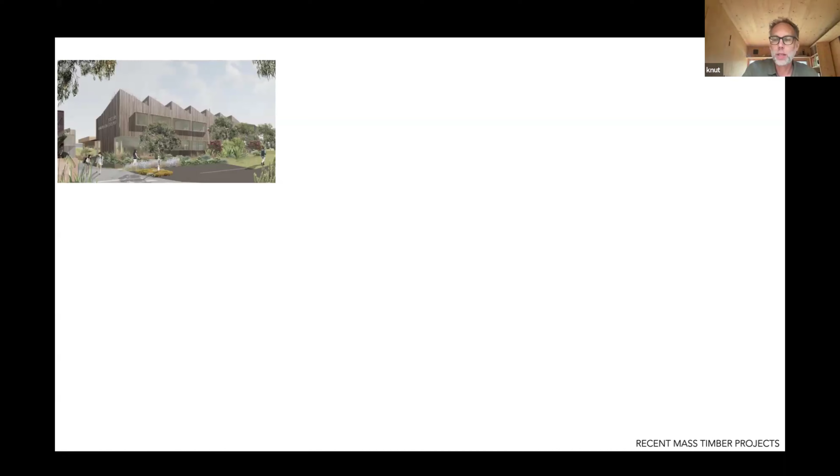It's a residential house, Passivhaus as well. I think there was a bit of concern from architects in general about using CLT, particularly in combination with thoughts about fire and CLT. So just very briefly, myself and my partner, Bettina Steffens, we're a small company in Coledale. All we do is CLT buildings, really, at different scales, mainly residential and education projects.

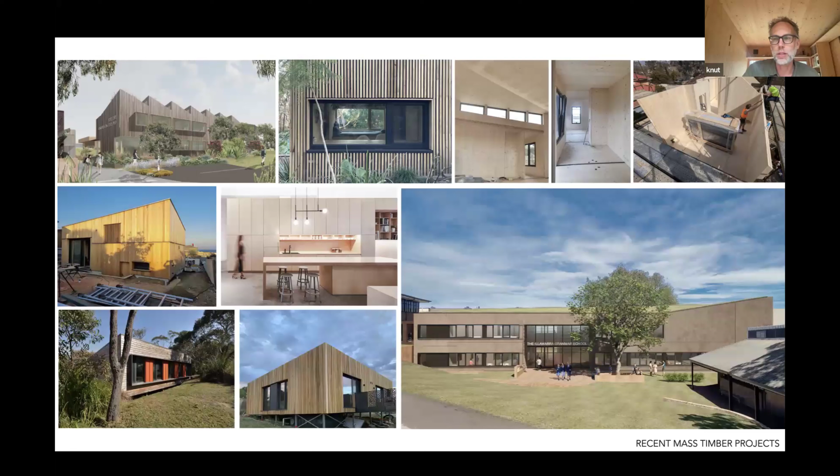Why do we use mass timber to start with? There are lots of reasons, and one of the big ones is the quality of the finished product, because it's prefabricated, built and pre-installed in a controlled environment. You've got speed of construction on site, and with that, cost reduction, because labor is expensive. Obviously there are health and psychological benefits of timber, the buzzword biophilic design, which I don't like to use often, but sometimes people can relate better to this. There's lots of research about the psychological effects of using timber in buildings on human beings, which I think are really valid points.

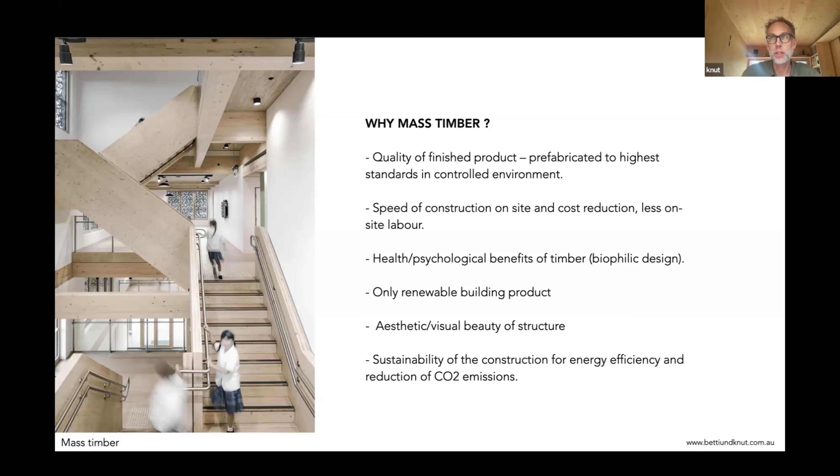It's the only renewable building product. Obviously we like the look of it, the way buildings are put together and the structure and the way that it works. Then there's the sustainability of the construction: on the energy efficiency side, you've got at least a 100 mil thick timber panel as your main structure, which is very different to having a 150 mil thick piece of concrete as your structure. Then there's the reduction of CO2 emissions, which is one of the main reasons we have as a default to use CLT, to reduce the impact on the environment.

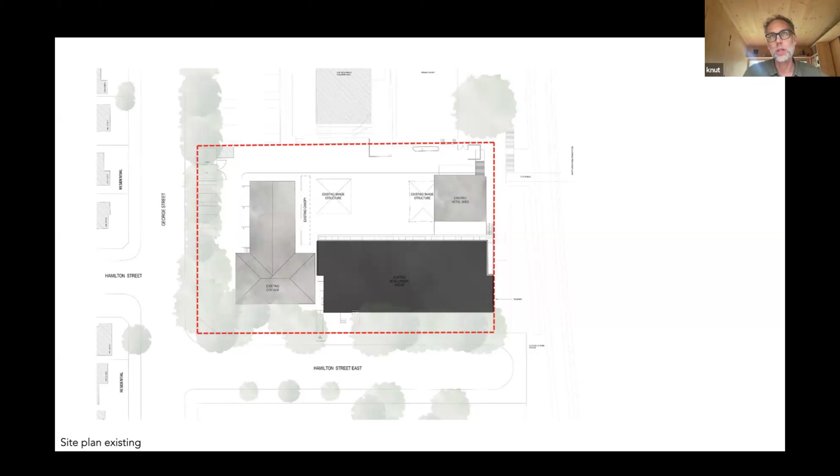This project, Our Lady of the Assumption, is a primary school I worked on when I was still at BVN, and I think it was Australia's first CLT school. This is not a Passivhaus project, which is the other part we usually use in our work, but it was one of the first CLT projects. The project uses an existing building, an old Telstra building from the 1970s. The Catholic Education Office bought this building and thought they could just turn it into a new innovative primary school, which we did in the end, but not in the way the client originally anticipated, with just doing a refurbishment or fit out.

This is the final project. It's a very small site, as you can see, very constrained for a school going from K to year 6.

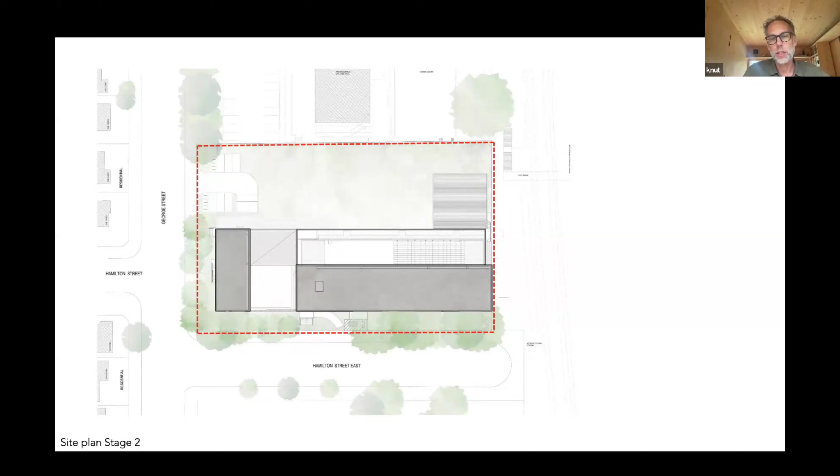So we used some of the roof space for playgrounds and sports fields, and we built on top of the existing structure and extended it with a new hall, all in mass timber.

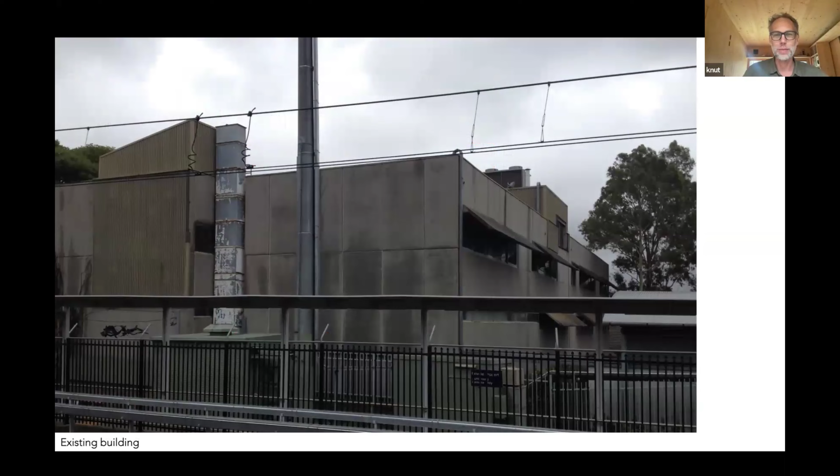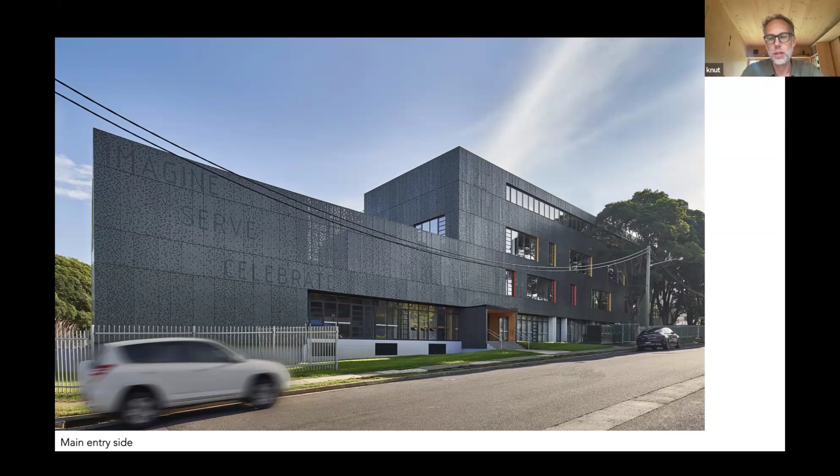The outside is a zinc facade with some custom perforations and play with words from their logos and visions. Internally, it's all exposed timber as much as we could manage.

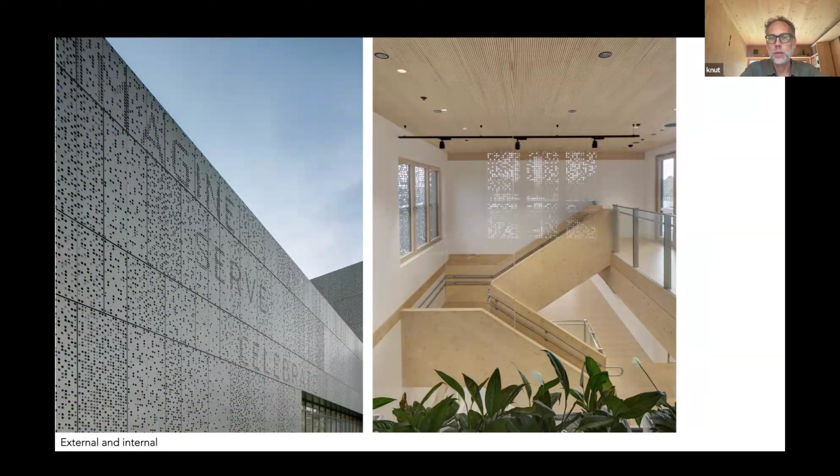There are only some parts, mainly the atrium, where we had to enclose the CLT because we've got a 4-story atrium here. As you can see, we have a stair that runs through the entire atrium. It's an open atrium, and the stair uses the CLT as the structure, so there's no additional steel.

That stair on the right cantilevers quite a bit, without any additional support except the part you can't see at the bottom. And we've used timber throughout, including the ceilings.

I'm going to go into quite a bit of detail on the ceiling here. There's an acoustic timber ceiling, part of the prefabricated system, which had a huge impact on this project. This is the top floor of the building.

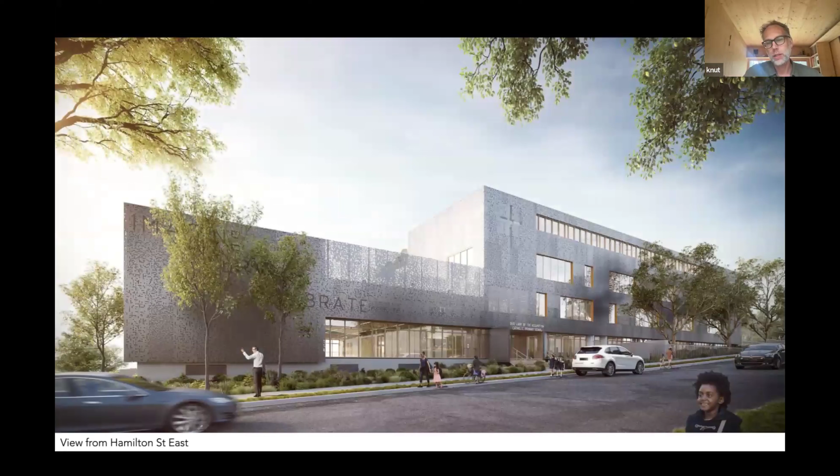Going through the different parts - I'm just going through the render to show its build up. Obviously the external part of the building. Internally, the gray bit is the existing Telstra building.

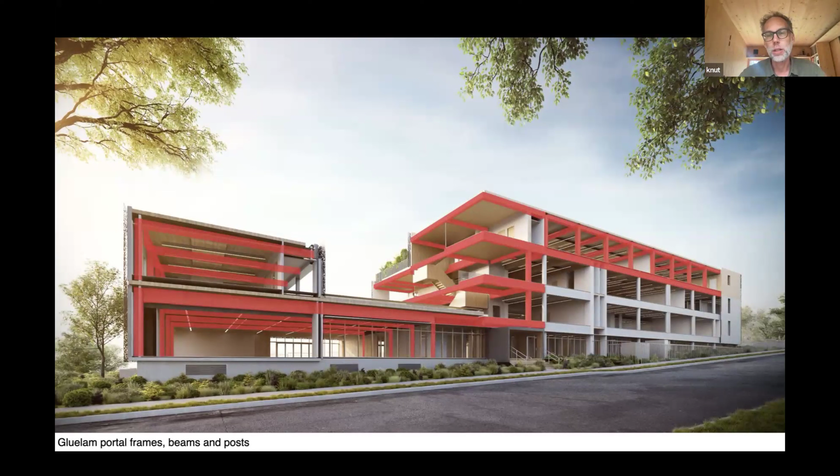Then all of the glulam timber columns and beams, using a very interesting connection system from Switzerland, from Neue Holzbau AG. We even have moment-resisting connections on the top part of the roof, which a lot of people in this industry say isn't possible in timber, but it is if you've got the right products. All the walls are CLT, cross-laminated timber.

Our ceilings or slabs use a cross-laminated timber system with prefabricated acoustic ceilings, from a German company called Lignotrend, which was a huge part of getting this project over the line, mainly for cost reasons. I'll go into that a little bit later.

Looking at the existing part - this was a very complex project, and probably not the easiest to showcase the benefits of mass timber construction, though it still does. You start with a building from the 1970s, which had concrete columns.

The columns were 30 mil, 50 mil off - there was a grid there, but obviously it's not perfect millimeter construction since it's in-situ concrete. But the timber structure comes in with a 2 millimeter tolerance, so you have a very precise building put over the top.

So what we had to do to start with was take a 3D point cloud survey of the top floor to see exactly where all those columns and existing beams we were keeping are located, so you could use that as the basis for the 3D model for the timber structure. We got this 3D point cloud survey done, which had about 10 gigabytes because it picks up every square millimeter, which was essentially unusable because it was so large you couldn't open it with any computer program.

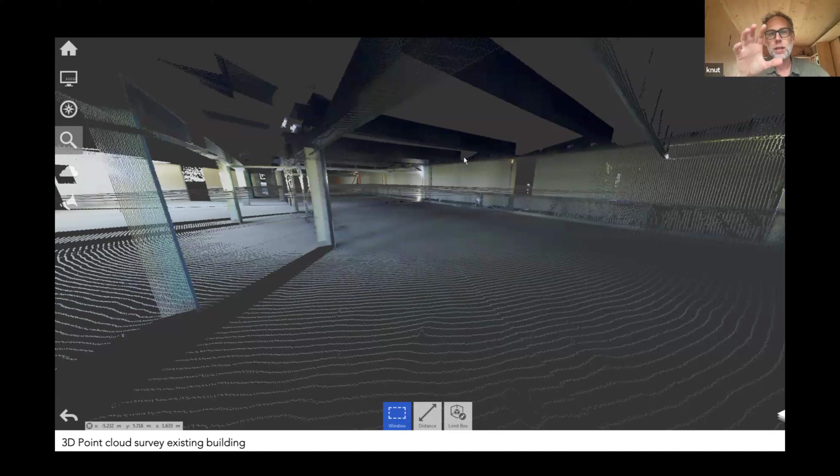So what we did there was we always used the areas where we had a connection as the real 3D point cloud survey, and the rest was just modeled generally, looking at the glulam portal frames, beams, and posts, going into some details.

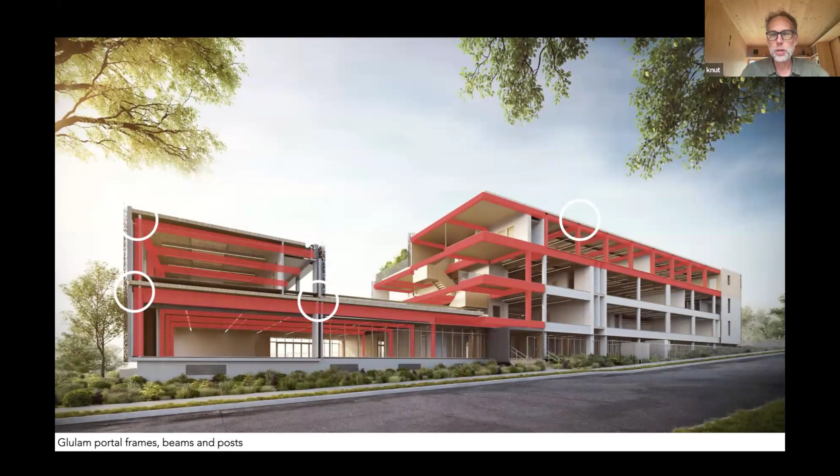As I mentioned, we've used Neue Holzbau AG, a Swiss company. They have a very good system of connections - glue laminated threaded steel rods that are integrated into the timber, which is great for fire performance because none of that steel is exposed. And then these elements go together really easily.

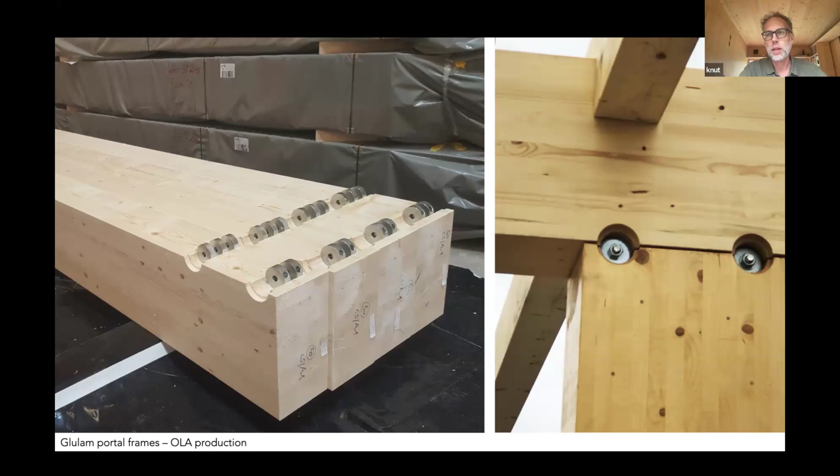I'm going to show you one of these - these are the top floor columns and beams. On the left side is the product as fabricated, and on the right side as installed on site. There are two nuts that needed to be fixed to get this connection going. In general, from all the installations, it takes about 15 minutes to install any timber element, whether it's a column, a beam, or a slab. That way you can actually predict pretty well how quickly the building will be put together.

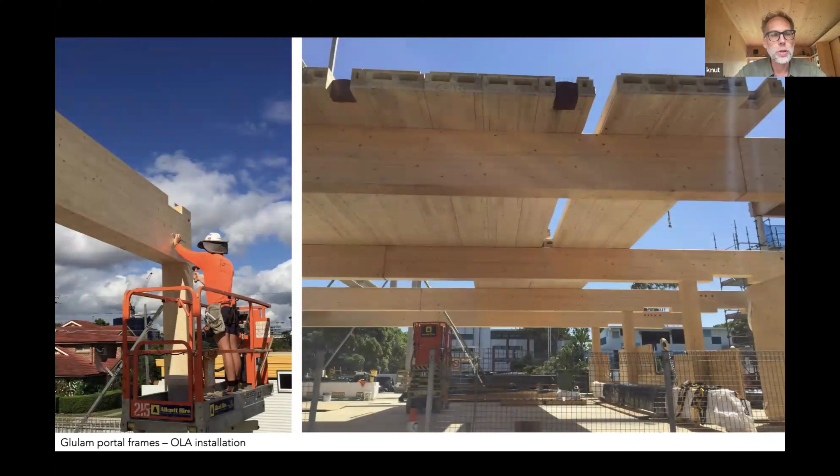What you can see here is the hall. You can see the guy on the left side - he's just hammering in 5 bolts, and that's it, to connect these 18-meter, about 900 high beams for the hall. It's a bit more of a detail here - again, very strong and very safe connections because they're fully embedded in the timber. As you can see on the left side, those holes will then be plugged with timber and rock wool so you have protection for that little bit of steel that is otherwise exposed.

It's a very fast way of installing it because with some connections you have lots of screws and that takes some time, but these ones are a very, very efficient way of installing. You've got the continuation in the beams - a little bit of what you can see here is the ceiling. This is actually a photo from the site on the day it was installed.

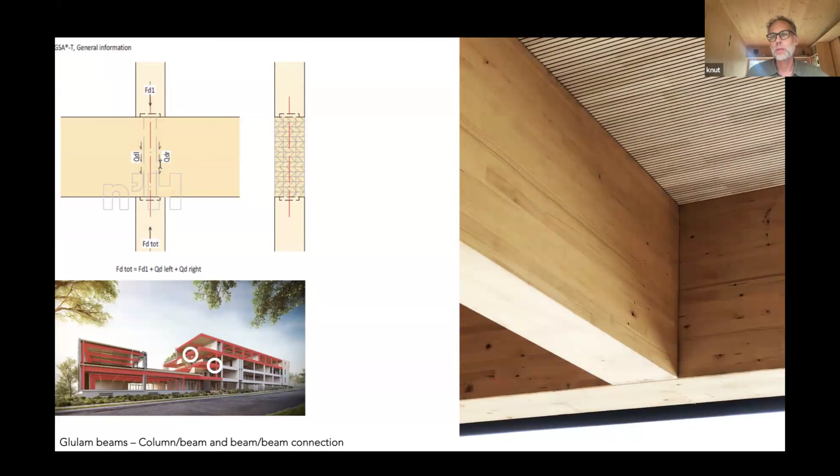That was one of the reasons why, with the Lignotrend CLT slab system, we were able to convince a builder who won the job on the cheapest price and thought they could convince the client to go traditional and do it all in concrete and steel. We had to run through a whole value engineering process, and at the end of that process we were still there with the same solution - quite an amazing outcome, considering the builder had no interest in building this in timber because they didn't know about it.

You can see on this beam connection you don't see anything in terms of connections, because these beams - the 9.5 meter long beams - had brackets installed in the timber, as you can see on the top left side. They were moved in from the top, and then there are just 2 screws fixed from the top. Once you put the CLT slab on top of that, this piece of steel is fully encapsulated within the timber, so it is safe from fire in its first instance.

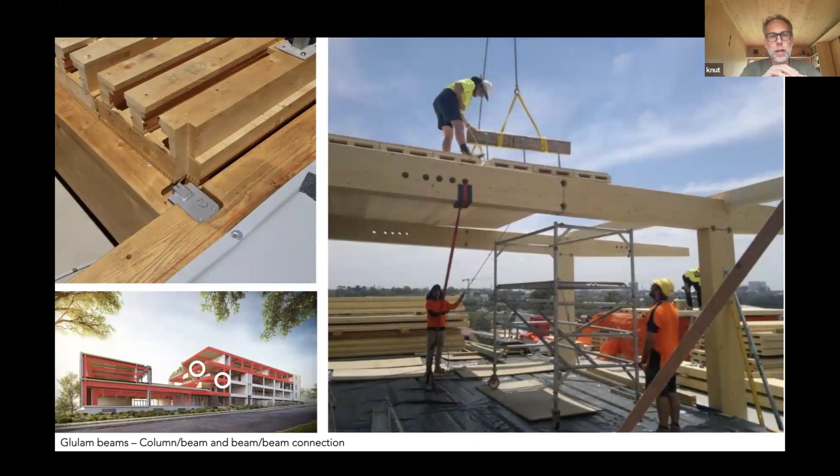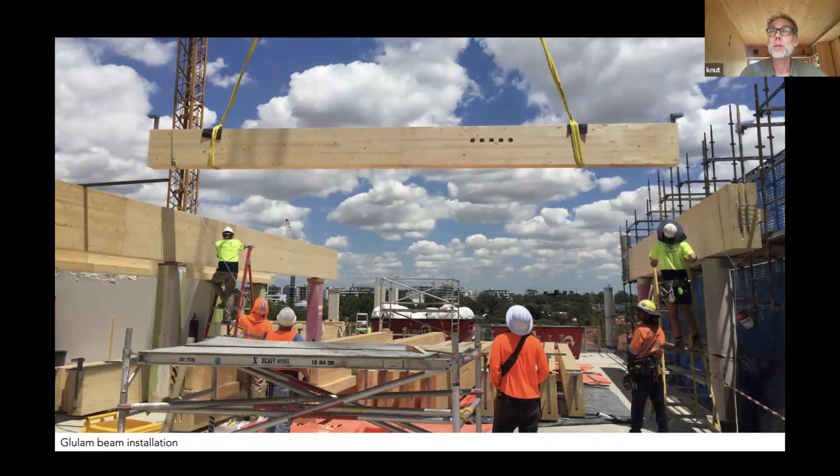Also, what you can see is there are very few people on site. These guys have been running the project, about 3.5 to 4,000 square meters, with a team of 6 people for the timber structure. In an ideal world, they would just come to site, do their job, finish it, leave it, and then the builder comes back in and continues. I think that's one of the key lessons we've learned over the years - if you've got a good team of CLT installers who know what they're doing, and a good head contractor who knows how to plan and follow on with other trades, that's the key to a good mass timber project.

You just see a bit of the roof structure here. They did about 500 square meters a day of the slabs to finish that off.

Walls, as mentioned, we're using cross-laminated timber, so there are some smaller elements as you can see on the left. Some elements were harder to reach with the crane, so they were pre-assembled, like this corner, then craned into place and fixed.

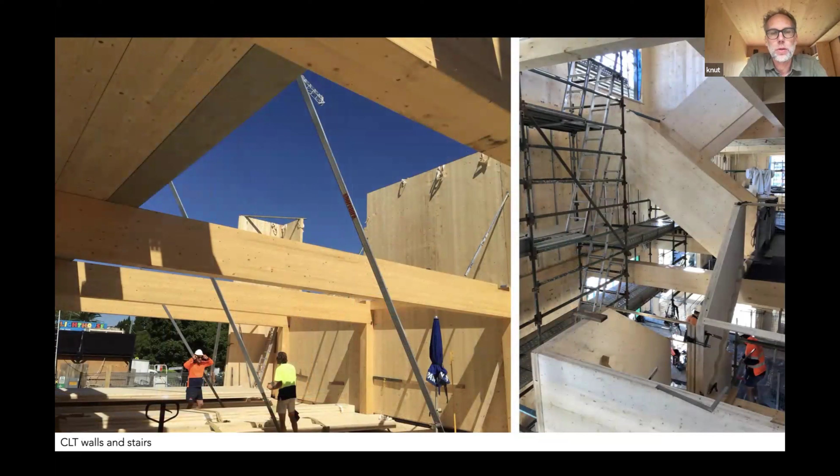We've got other areas like here where we're using double height, so these timber panels on the left side in the hall go over 2 stories. We often use CLT from overseas, from Austria, for lots of reasons, and you're a bit restricted with size due to container size. 2.25 meters is a good width for any panel, but you can go up to 11.5 meters long, so we're trying to make the most of it. That's why the panels are used vertically rather than horizontally, going over 2 stories.

On the right side, you can see how the stair was installed. First the balustrades were installed, which are the main structure of the stair, and then the treads were added in. That's a view of what was later the reading nook.

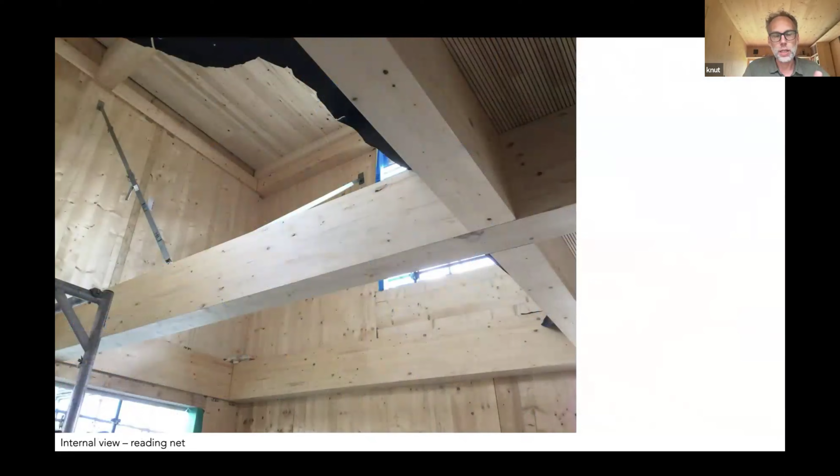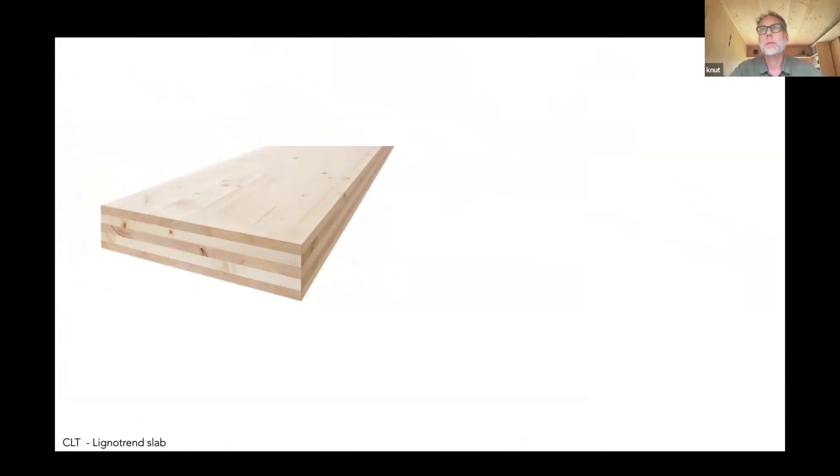Coming to the slabs - these were crucial because generally we'd use a solid CLT slab with our floor built up and our ceiling below. With a school, acoustics are really important, and an acoustic ceiling is a must, so there was no way of exposing the CLT as such to just get the acoustics going within the spaces.

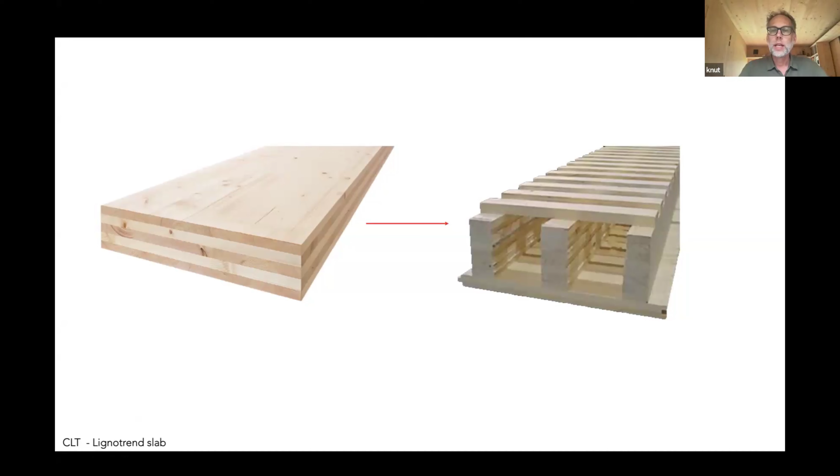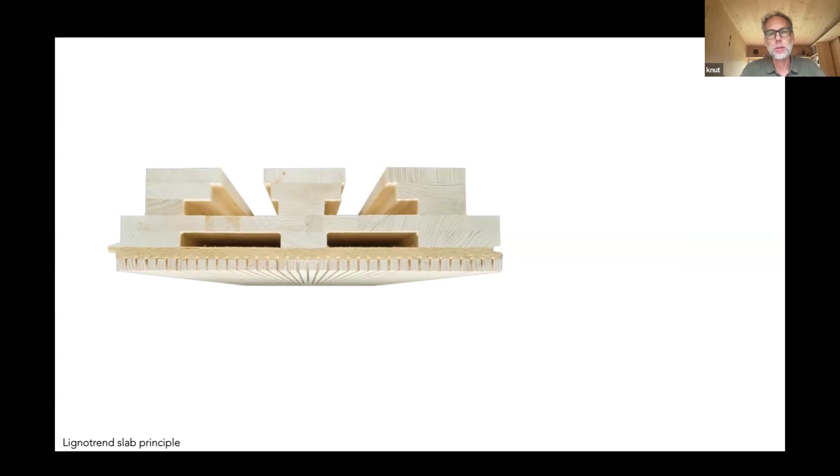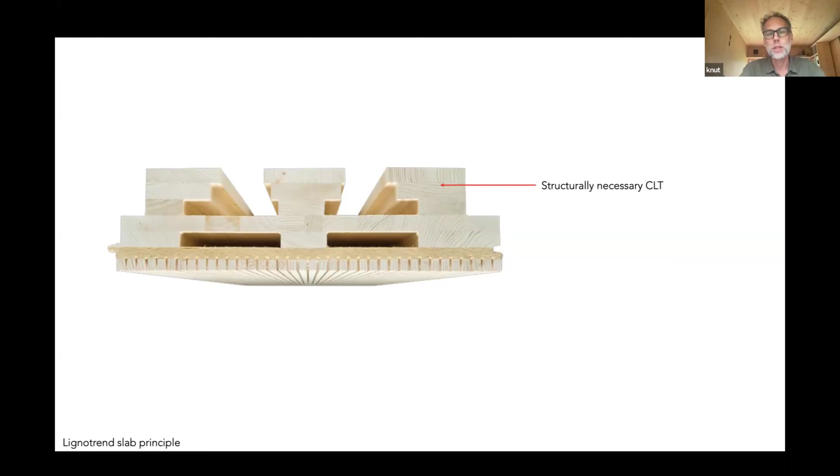So you've got the structurally necessary CLT, which is obviously necessary for your structure, and each project has different sizes. This is a very small size of those panels here - it depends on the spans, etc.

Then you're left with the services zone, so in this zone you can install electrical conduits. We've also installed the sprinkler pipes in this zone. Then you've got your additional layers, and that depends on what you need.

For example, in our project, generally you've got a 120-minute fire rating for a school project of type A construction, which with fire engineering we've been able to get down to 90 minutes. That means this area is where we increase the thickness of the CLT to achieve the 90-minute fire resistance, mainly done by the charring.

And then you've got your finish - it could just be a plain CLT finish, or an acoustic ceiling. This is what saved us the cost, because the additional cost of that beautiful timber acoustic ceiling was sitting at around $30 a square meter as additional cost. If we had taken this as a suspended acoustic ceiling, the same ceiling, and installed it on site, it would have cost us $220 a square meter.

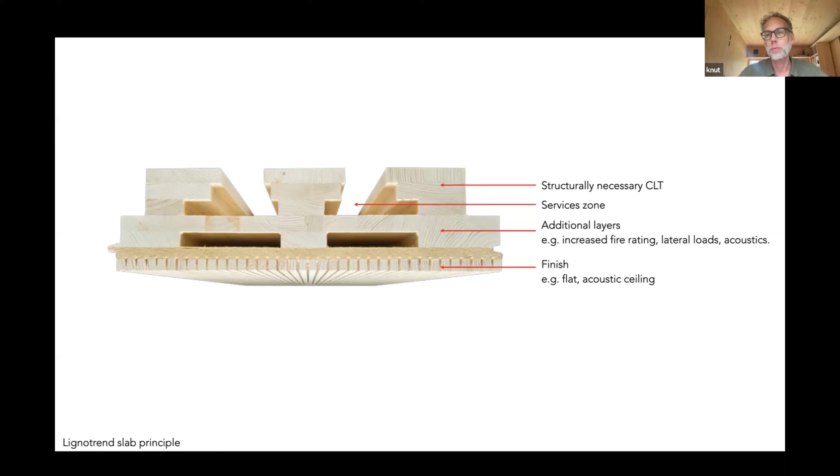That cost saving was, I think, one of the key reasons the builder was unable to get this to work any other way, because even with the cheapest concrete and steel structure, they wouldn't have been able to meet that cost with that price difference. This comes to the point that if you can do as much as possible within the prefabrication part, that's where you really gain the benefits in mass timber.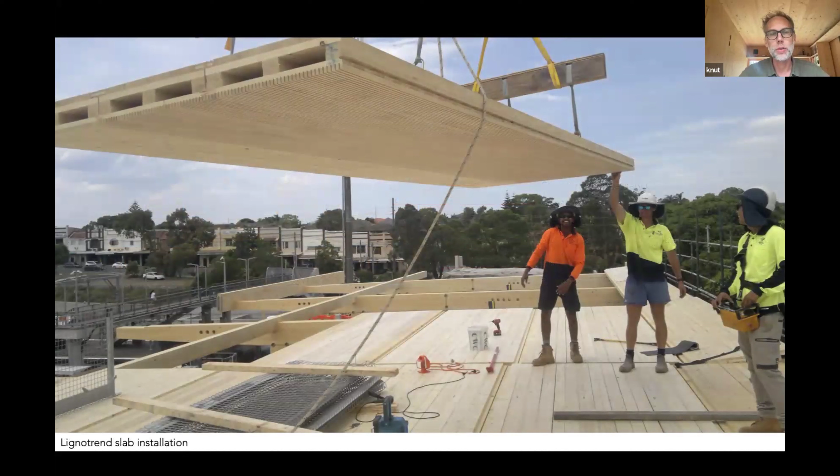This is how the slabs were installed. You have to be careful and think about how you actually lift them in place, because you can't just put a sling underneath - you'll ruin the underside, and it's also harder to get it in place. There's an interesting system the installer came up with to lift those panels in place, and then they're essentially lowered down onto the beams.

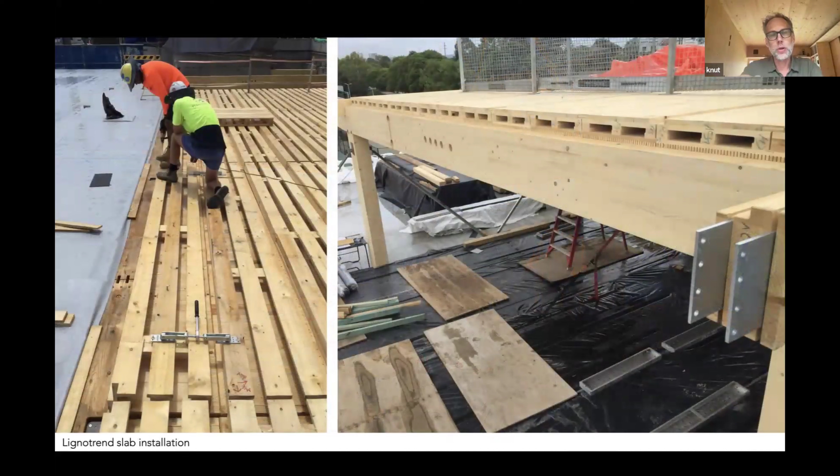And then with any type of CLT slab, or whether it's this system or another one, you still have to get them close together. So you see the ratchet at the front there, that's how you get the last centimeter from one panel to get them really tight against each other. And then there's lots of fasteners to go in, usually about 280 to 350 mil long, every 300 mil. That's how the whole structure is put together.

So on site, it's very interesting because it's a very clean site generally. This one was a bit different because we had demolition and an existing building, but generally a CLT or mass timber site is very clean and quiet, not that many people around. So this shows the system here, how it's then getting installed.

So you have all your services that you want to run in those areas, and then the leftover space is filled with an aggregate. This is mainly for acoustics, to get better acoustics out of the floor, because otherwise you're left with hollow spaces. With the mass of the aggregate, you get a good acoustic separation between the levels.

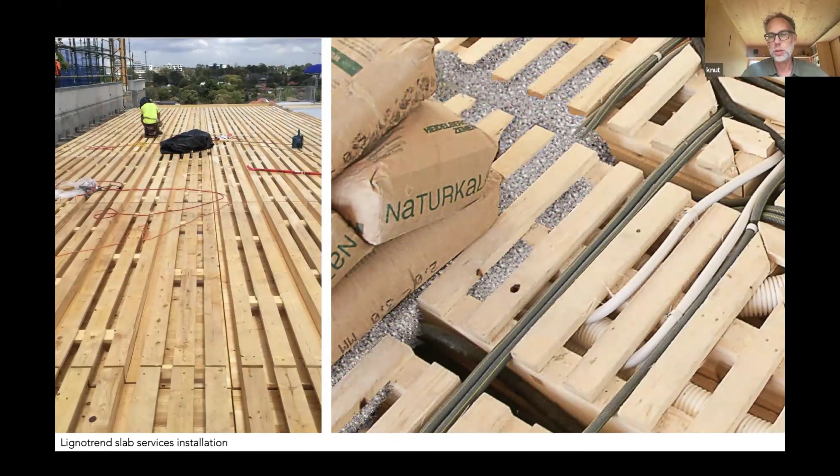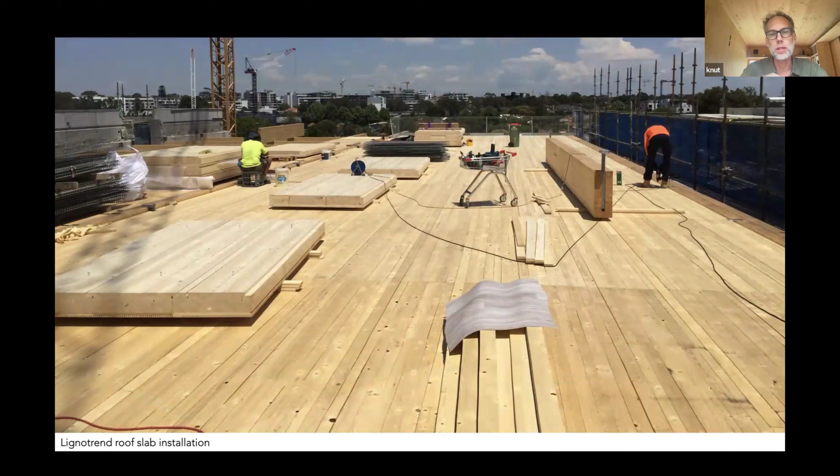Again, this is a photo from the day it was installed, so you've got a really beautiful, perfect ceiling there. And just some other photos from the roof installation. The roof slabs are not open at the top because you're not running services there, and also it's for keeping the weather out of the building. So you've got a closed top for the roof panels. This would be more like a traditional CLT panel.

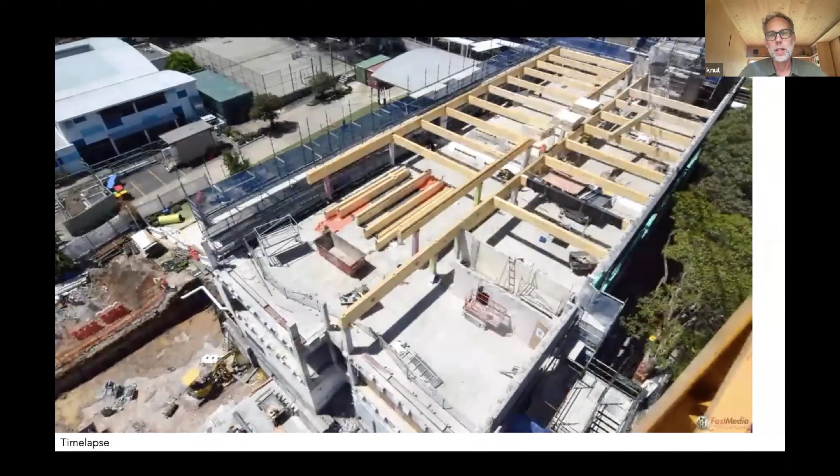And that's a very short time lapse, shortened a little bit just to show that part of the installation. You can see how the beams were installed, how the slabs went up.

I think key, as I mentioned, is the installation, and the follow-on trades to get this whole thing waterproof.

You can also see the build-up on the roof up there. Generally, this was not built as a passive house, but it was installed in similar ways. So we've got our insulation on the outside, and then our waterproofing membrane, and the same build-up for the walls.

This is just a little comparison that I usually like to put up with all of our projects, just looking at how much CO2 has been stored in the project. So in this project, we've stored about 1,400 tons of CO2 in the project's mass timber. If that had been built traditionally, we would have emitted 800 tons of CO2. So a very different perspective there. And that means essentially we've taken 490 cars off the road for a whole year.

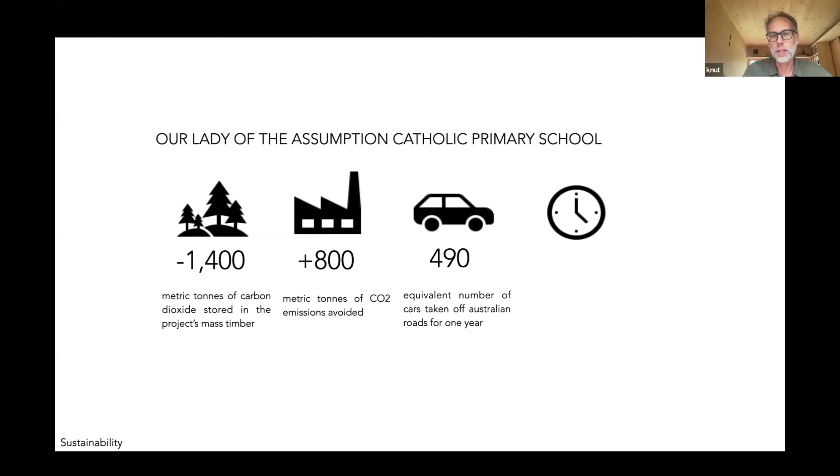And all of the timber that's been used in this project is regrown in 23 minutes. That's the regrowth rate of timber from where the timber was coming from.

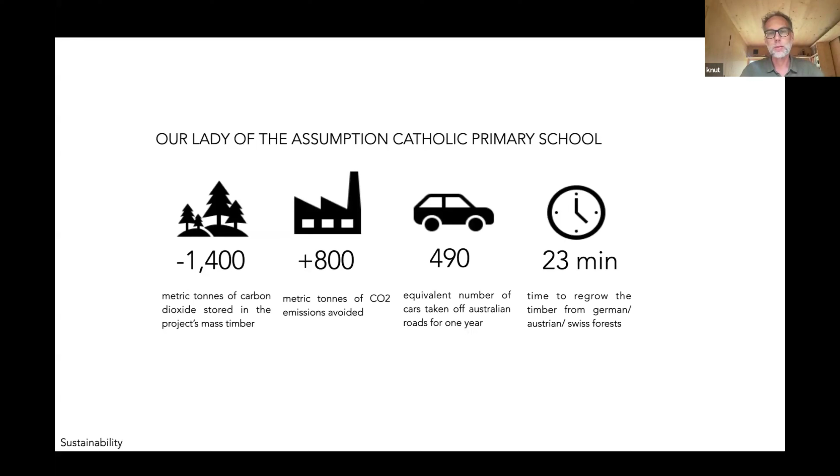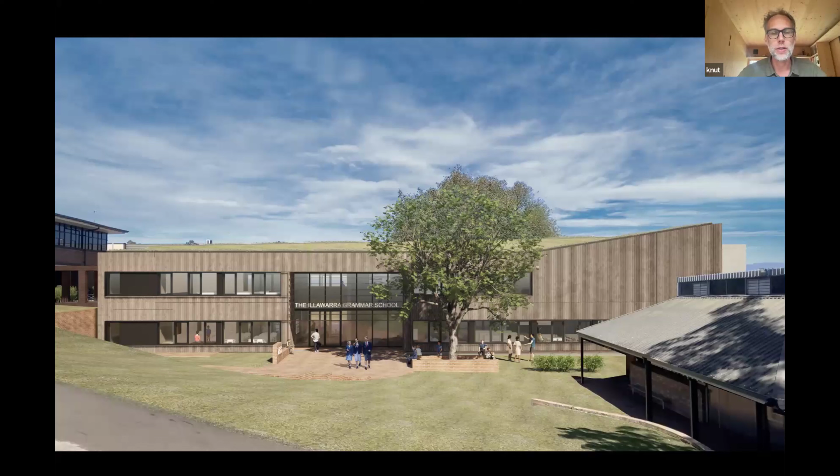And so just to lead into Russell's presentation, we just wanted to quickly show the project we're currently working on. This is the Illawarra Grammar School. This is going to be Australia's first CLT Passivhaus school, so another step further. That's a project we've just sent out for tender, so it's currently out in the market.

Two-story building. As you can see here, it's got a huge green roof.

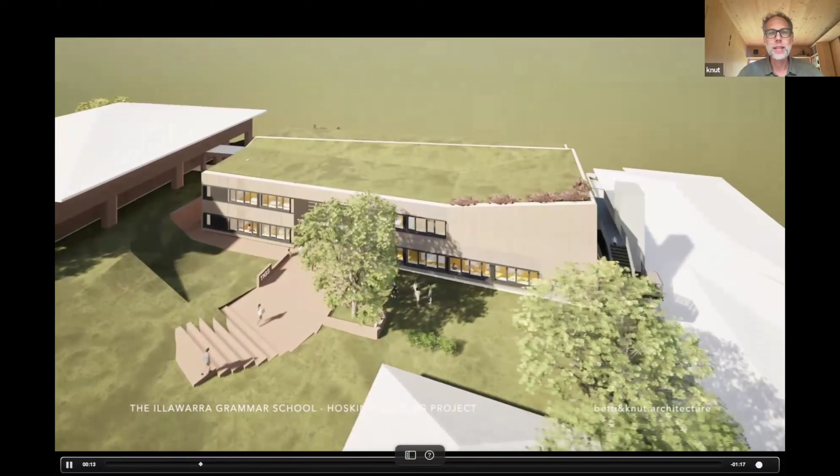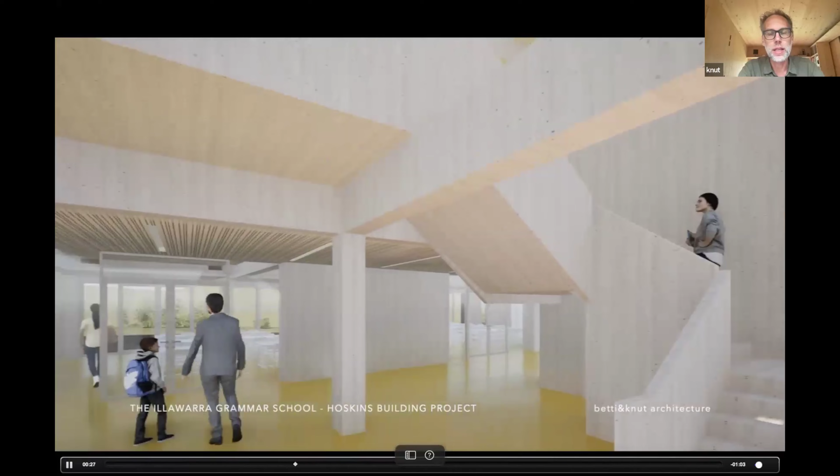Two-story building. We've got a timber facade in this case, which was great, and Russell has been able to justify that in the fire engineering. We've got the main two-story entry, again with the CLTs there, exposed CLT. We're exposing as much as we can. Again, we've got an acoustic ceiling.

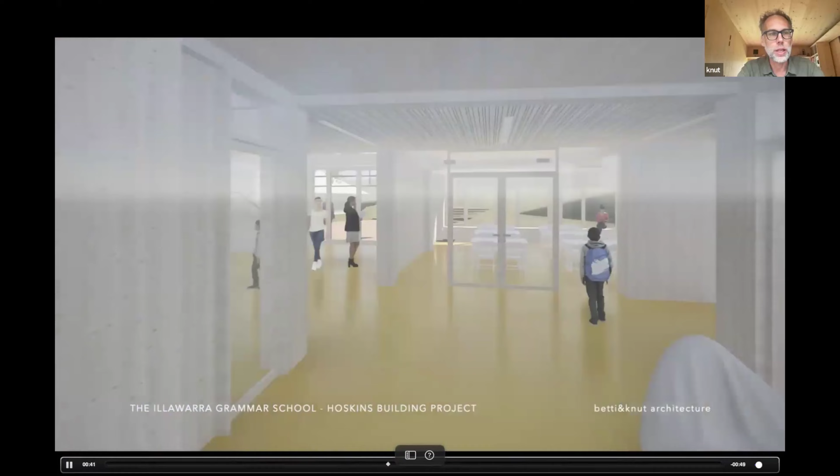Classrooms on the ground floor, we've got junior school classrooms, so there's a home base, then there's a withdrawal space in between, and then we move back into the central practical activity area. On the upper floor, we've got the senior school.

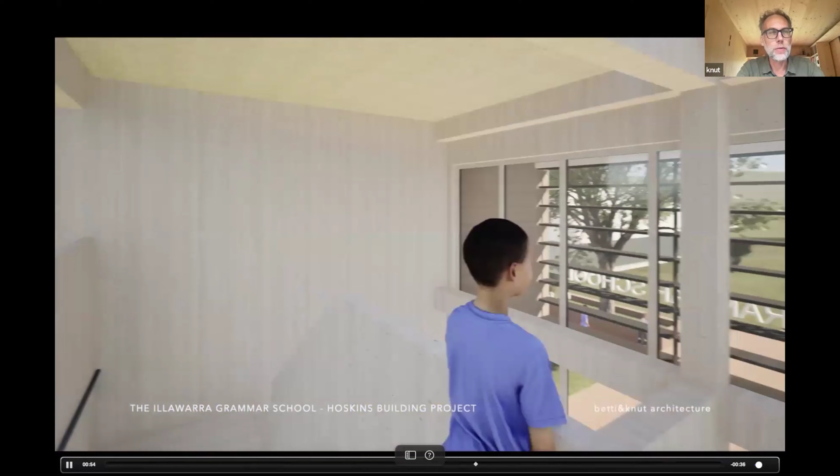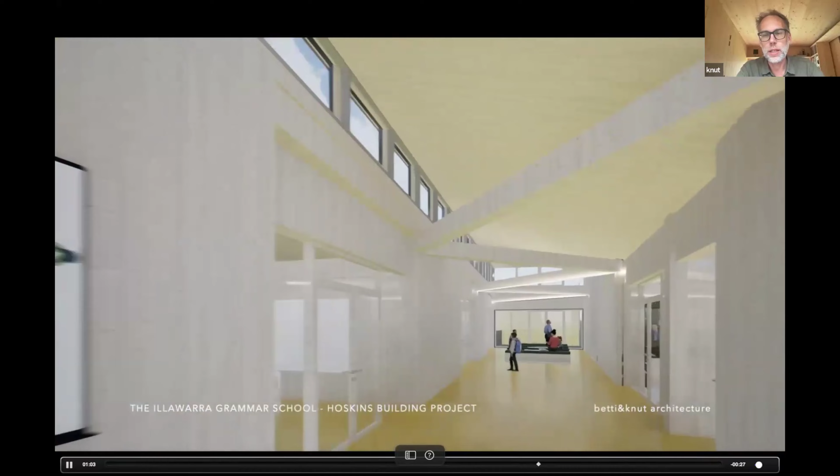Just turning a bit around. Senior school with 7 classrooms. We also have a junior library on the ground floor, and then we've got a large, mid-size 150-seat auditorium on this upper floor. Again, all exposed CLT, with our acoustic timber ceilings in place.

So that's a really neat project that's hopefully going to get built in January next year. And just some more images of that.

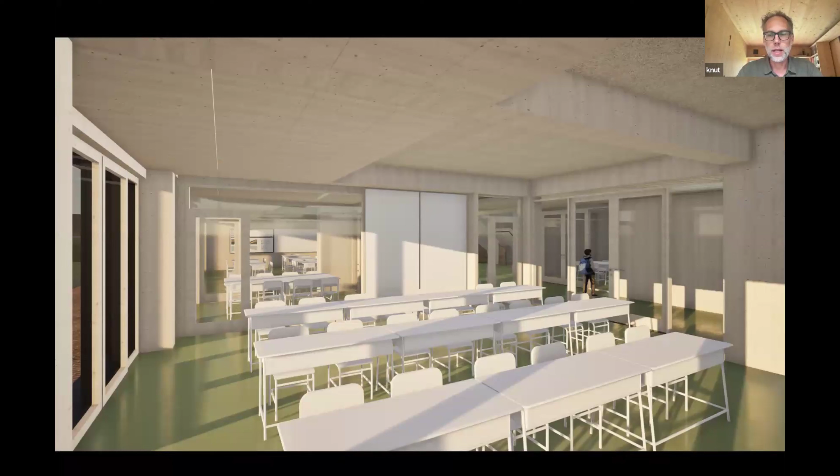And then I'll leave it up to you, Russell, to talk about fire in those cases.

Oh sorry, just quickly, a comparison. Again it's a bit smaller than OLA, about 800 tons of CO2 saved in the timber, stored in the timber, 380 tons avoided, about 240 cars off the road, and the whole timber here is regrown in 13 minutes, which I think is always a nice statistic.

And leave it to Russell to continue. I'll bang through this as quick as I can.

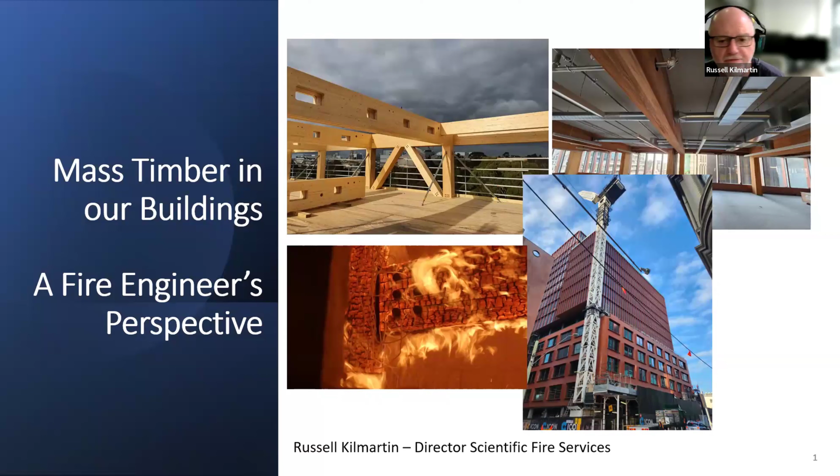So from a fire engineering perspective, timber and fire, you would think they don't match, but that's probably certainly a myth. It's been our experience with our involvement with mass timber in buildings and global research that in fact it's a wonderful product with respect to fire, if it's developed from a design point of view and installed properly. It can be a wonderful material and they can cohabitate.

So in 2016, the Building Code of Australia — and I'm probably telling architects here things you already know — codified mass timber and brought it into the code, after a lot of lobbying from the Timber Development Council and other authorities around the country. It allowed residential buildings and office buildings only. Then in 2019, the BCA expanded that to all buildings, including education buildings, schools, etc.

Then, not within Australia but in 2021, the International Building Code introduced 17 changes with regard to mass timber, and I'll go through those shortly as well.

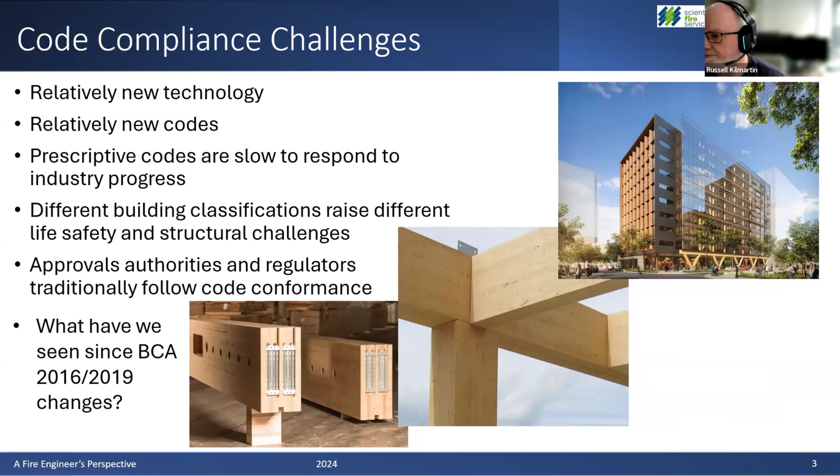So there's been an uptake in building codes, ever so slowly, to allow mass timber. Whilst it's relatively new technology, people have been building with timber for centuries, for millennia. It's now been codified in many codes around Australia. Approval authorities and regulators traditionally like to follow code conformance, and where we don't follow code conformance, that's probably where fire engineers get involved with projects.

So what have we seen since the 2016 and 2019 changes? Our office has been fortunate enough to work on a few projects. Starting in 2011, there was the Forte apartment building in Docklands, Melbourne — a 9-story building. Then an assembly building, a library building, in 2014; a mid to high rise office building in Brisbane which was predominantly exposed mass timber; and student accommodation at La Trobe Uni. I've highlighted these dates red because they are all post the 2019 building code.

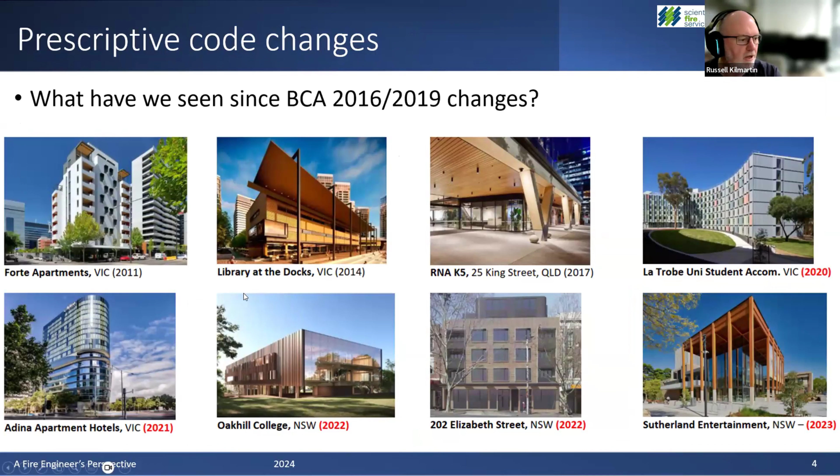Certainly our office is not the barometer of timber at all — this is just our experience — but pre-2019 there were 3, 4 or 5 projects, and post-2019 all of a sudden the uptake of timber in buildings, in different types of buildings, shone through.

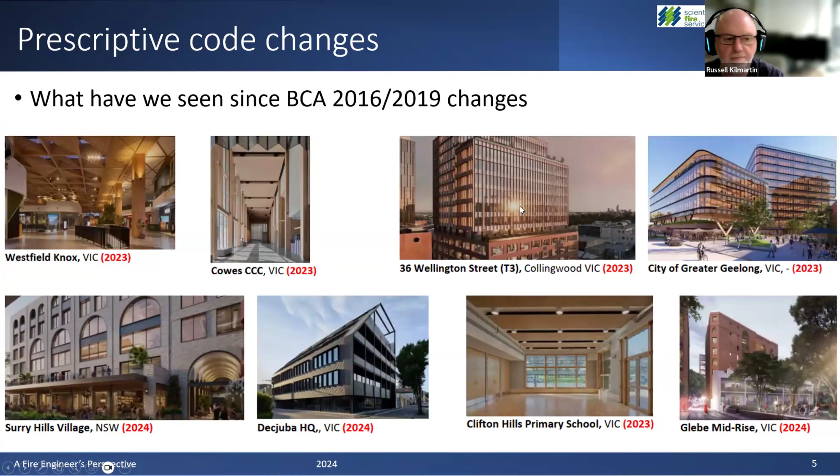So this is an education building, this is a hotel — a 10-story timber structure on an existing 7-story concrete podium. Another hotel in Sydney, CLT predominantly; an entertainment venue in Sutherland, Sydney; a shopping centre; a community centre. This is Wellington Street, Collingwood, a mid to high rise office building in Collingwood, Geelong, Surry Hills in Sydney, et cetera. And another primary school there.

So the uptake has been good to see, not without its challenges, but certainly considerable.

With regard to fire brigades — and you'd be dealing with fire brigades regularly in submissions with any project — AFAC, the Australasian Fire Authorities Council, representing all the fire brigades around the country, has put a guideline together. They're reviewing it now and watering it down a little bit, but it's good evidence to demonstrate that the fire authorities haven't got their head in the sand. They're stakeholders in the built environment, so they've put guidelines around designing and constructing mass timber so designers take their concerns into consideration. That's been good to see.

The current limitations of mass timber get forgotten a bit. The prescriptive codes allow mass timber in buildings as fire protected timber, meaning fully encapsulated — can't build more than 25 metres in height. There are encapsulation rules, 1 or 2 layers of fire-rated plasterboard. So if you're wanting to express timber as an architectural aesthetic element, the building code hasn't really done you any favours. However, if you're purely looking at it from a sustainability point of view and the timber being visible isn't critical, then that's a good step.

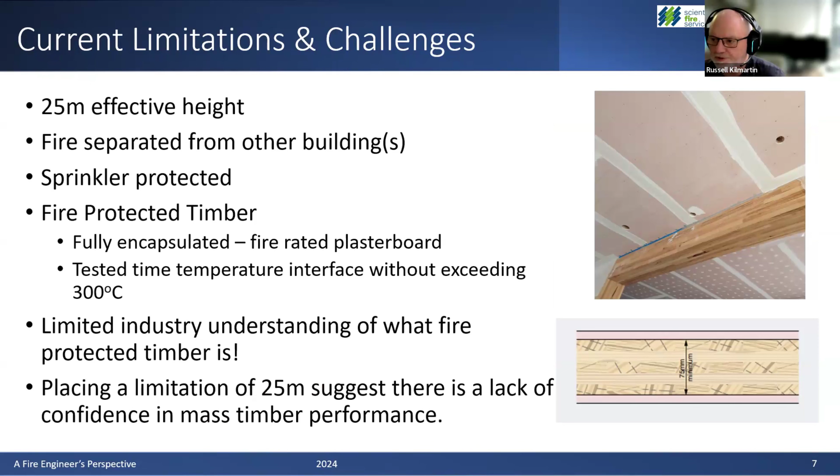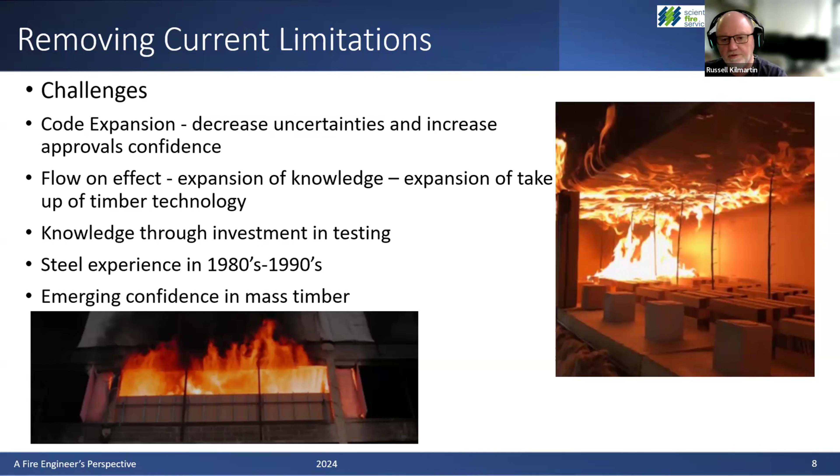There's a lot of research going on globally and in Australia. Looking at it globally, and this relates back to any building including education buildings, this is what's happening in North America with the International Building Code. They've just introduced in 2021 a raft of prescriptive code compliance allowances. You can see this one here on the right. It allows in their code, under certain circumstances with certain sprinkler provisions, building up to 9 stories, fully exposing the timber, no encapsulation required at all.

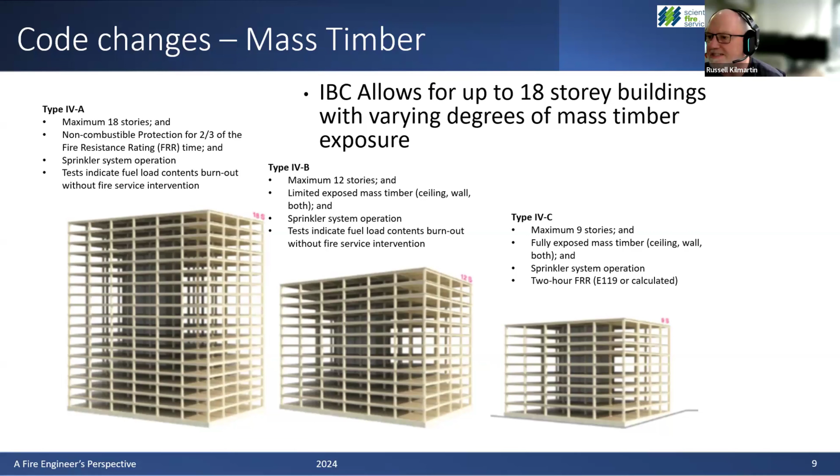There are calculations in science and engineering that need to justify the design, structural being the obvious one. As we go higher, we see some 12 stories with limited exposed timber and more testing required. Then we get up to 18 stories, which is a fully encapsulated timber structure with some parameters around that as well. So there's a global acknowledgement that designers and the community want to see timber, but as we go up in size and scale, risk increases, and therefore other measures are necessary.

What I like to express whenever I'm presenting any particular project with timber is it's not just the structural element. The structure's not too difficult to imagine, particularly with a good structural engineer and good architect. The structure's one part of it, but it's occupant life safety as well. Where a building has a lot of timber exposed, we need to demonstrate whether it's a safe environment for occupants. Have they got time to evacuate the building?

Have they got time to safely reach the fire stairs? Similarly with brigade, depending on the state, they have a call-out time that they try to adhere to. We need to demonstrate that a building, when the brigade arrive, they've got adequate firefighting equipment, but also will that equipment be enough to actually suppress a fire if all of the timber becomes involved in the fire? And there's an engineering principle behind that as well.

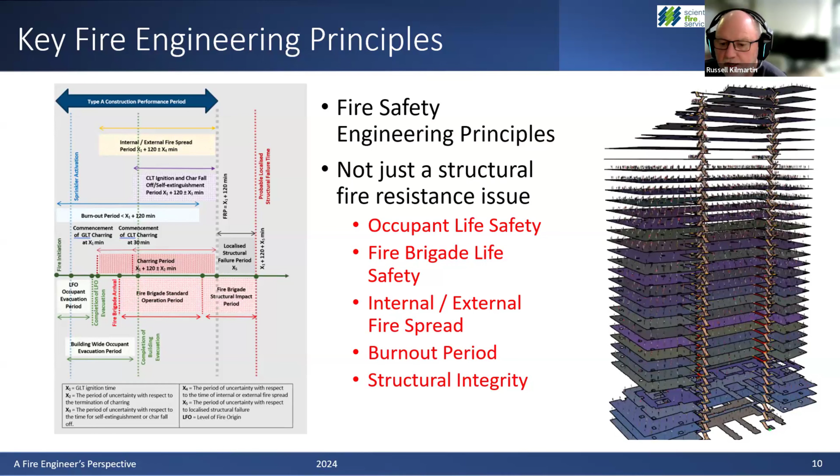Internal fire spread, external fire spread - these are elements that are important. Knut was showing an atrium in a building. It wasn't a 20-story building, it's a low rise, so it's less consequence. But you can imagine a building with an interconnected atrium portion up high, that if a fire was to get away from the systems in the building, then it becomes a bigger challenge for the brigade. So there's a lot more than just the structure and structural integrity.

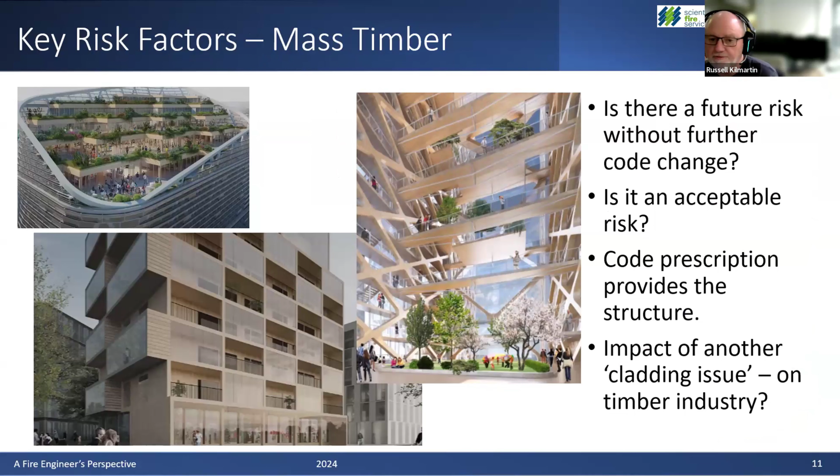So what does everyone want to see? Well, what architects want to see, what everyone wants to see is timber, timber, timber always. Every project I've been involved in, it's can we expose the timber? And the answer is under most circumstances, yes. Under some circumstances, definitely not. And that's where the fire engineering comes into the project.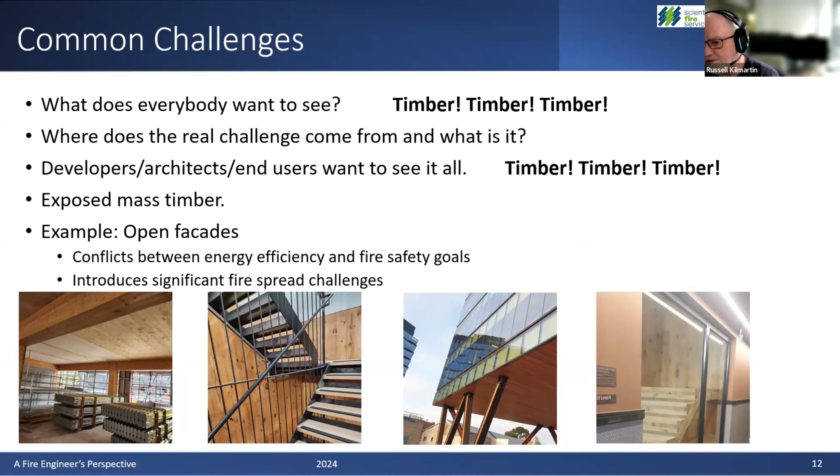This is inside a fire stair, second from the left, exposed timber in a commercial office building. This is some exposed timber in this commercial office building, and that's an actual fire stair in a hotel behind a fire-rated glass wall with drenchers. So there's a whole myriad of circumstances where timber can and cannot be exposed.

So in this case, it's surrounded by heat-strength toughened glass and wall-wetting sprinklers to mitigate fire spread between two levels. There is a bit of a lack of knowledge and understanding for building surveyors and fire engineers on timber, but that's growing. And as I said, only code changes will assist with that.

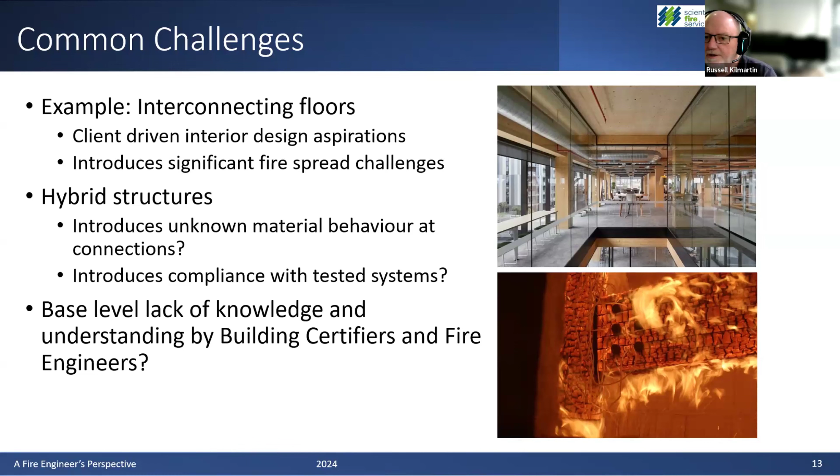I won't spend too much time on these next two slides, but in large, complex, multi-story buildings, there's a requirement for justification of testing, and sometimes that's the connections themselves. Those connections that Knut showed, I think have been codified or are likely to be codified in Eurocode, so that evidence can be used to support their use. But where they haven't, and it's a critical element, there's testing required, or potentially finite element analysis modeling as well.

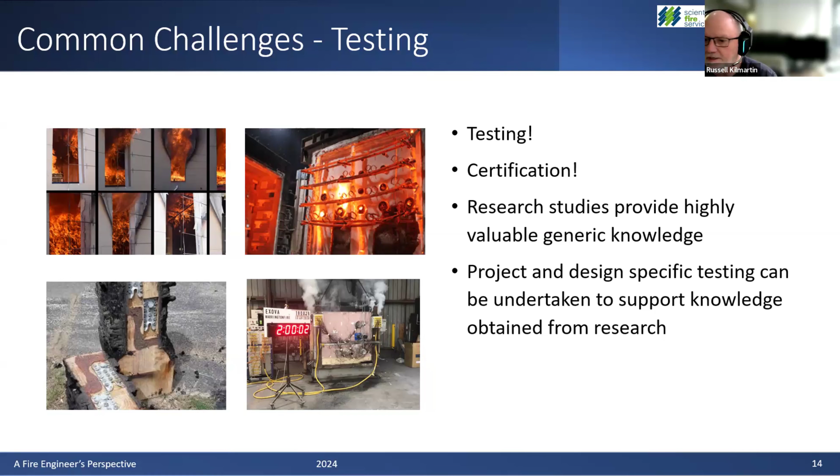And here's a good example. That's a beam and column connection that was tested for 2 hours in a furnace. Once it was taken out of the furnace, I don't think they extinguished it—they let it self-extinguish, tested under load. So the actual load of that building, that's how it was tested, structurally loaded. And it satisfied its 2-hour requirement, including the connection and the joint where those connections are embedded. So there is a lot of testing and research out there.

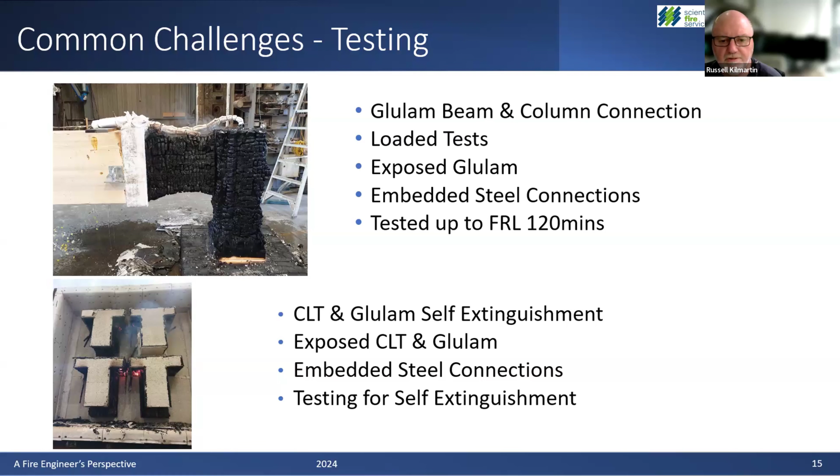So for education buildings, particularly school buildings where they are 1 or 2 stories, I wouldn't see this type of testing to be necessary, particularly for a single story building. You can build a single story building essentially type C construction, and timber is a perfectly acceptable solution. Once you start going up in levels, the 2-story building becomes type B, which is a peculiar recipe for construction. I've always found it—columns are required to be fire rated, but in some circumstances floors aren't. This type of testing is really for complex buildings.

So look, we're nearly there. The next slide is probably one of my favorite photos. I think this is the old Myer building in Hobart that burned to the ground a few decades ago. If you see this, what looks like wire hanging here, this is the old style steel within the concrete. So there was a concrete floor here—it's gone, burnt and collapsed and totally gone. You can see these main primary steel members. I'm not sure whether they're roof members or floor members.

And you can see this mangy, prickly old piece of material here—that's the timber beam. So once the building burnt to the ground, the only thing standing was the timber, still holding up the steel. I wouldn't say it's holding much up, but I just like it—it's a great photo to highlight that, yes, it burns, but it self-protects itself. Timber has a wonderful ability to protect itself through that outer charring layer, and the structural performance of timber can actually be quantified quite easily.

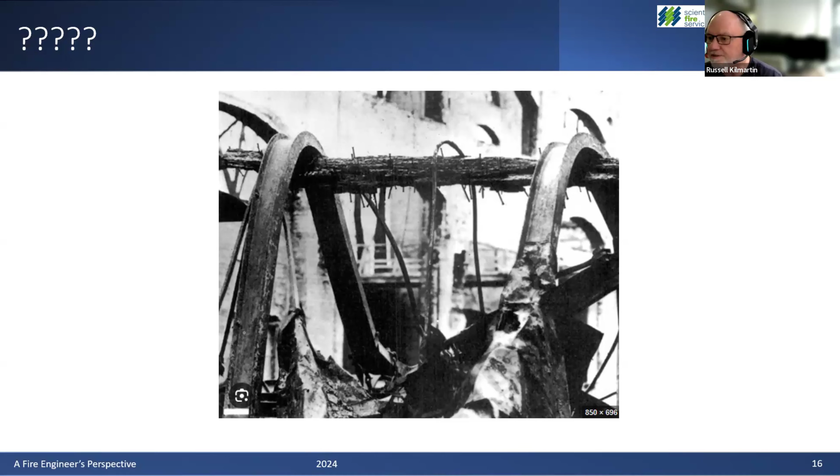Last slide. So just in summary, what I'd certainly like to see, and what I think the industry likes to see—I'm not quite sure how far they've gone down the path—but codifying carbon emissions for timber would be a great positive outcome, because once you codify something, it's further entrenched in the building code. But if you can codify the carbon emission reductions, even better. Codify sustainability objectives of timber. I'm sure this work is going on behind the scenes. It's not my area of expertise, but if these things can occur, unfortunately for architects, you'll probably end up having another consultant on a job you've got to deal with. I don't know how you do it, because every time the code changes, there's a new breed of consultant. But this area, I think, is important.

But changing the code and bringing timber into the code, allowing us to design, increases approvals confidence, speeds up the approval process, and decreases uncertainty.

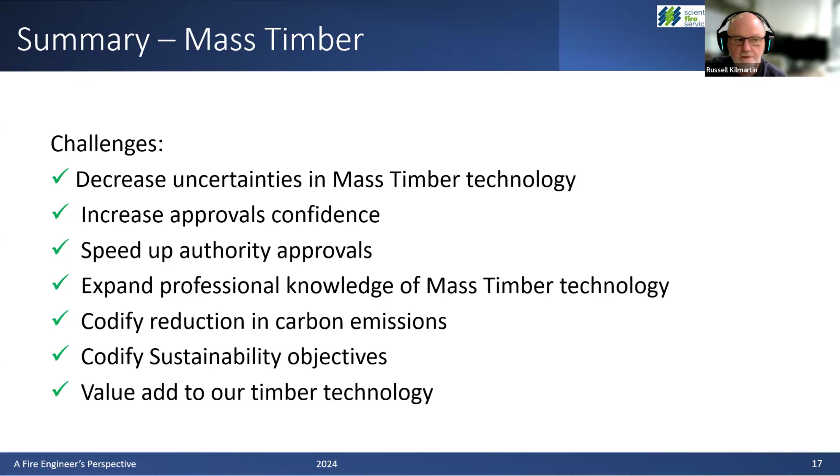Look, the presentation's not specifically targeted at education buildings, but having said that, most of the buildings we've been involved with from an education point of view have been low rise, which means they're relatively low risk. As long as the egress provisions are sound, occupants merely evacuate the building. I'm not suggesting you leave the building to burn to the ground.

New South Wales Fire Brigade, they like sprinklers in all of their buildings that have timber in it. South Australian Fire Brigade, we've found to be professional—conservative by nature, but that's what they need to be. They're quite professional and open about it. Single story building structures, I don't think there's any issue with timber—you can use timber everywhere. It's when you start putting multiple stories with particularly atriums and open stairs where it becomes a bit of a challenge. But there are systems and ways of dealing with that.

So yeah, we come into that game when it becomes a little bit difficult to comply with a prescriptive provision. I'll leave it at that. Thanks for having us, thanks for your time.

Thanks, Russell and Knut, yeah thank you so much. That was amazing, it was really informative. Ken, I think you're the only one with a question today.

Of course, it's a really interesting one. When we were talking about value management and how timber gets properly evaluated, I was interested in who you needed to have on board in the project team to make sure you were advocating, bringing the cost not just of the materials, but also through construction, everything like that, especially if you had builder pushback.